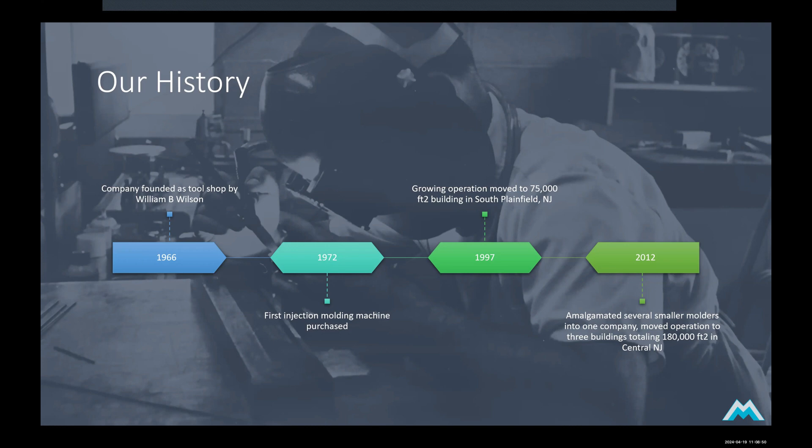Montrose Molders has extensive in-house capabilities. We do injection molding, extrusion, tool making, part design, assembly and labeling, decoration, and we're also ISO 9001 certified with ISO 13485 pending. That's the medical device certification, and we're vertically integrated with resin distribution, so we're able to obtain material at a good rate.

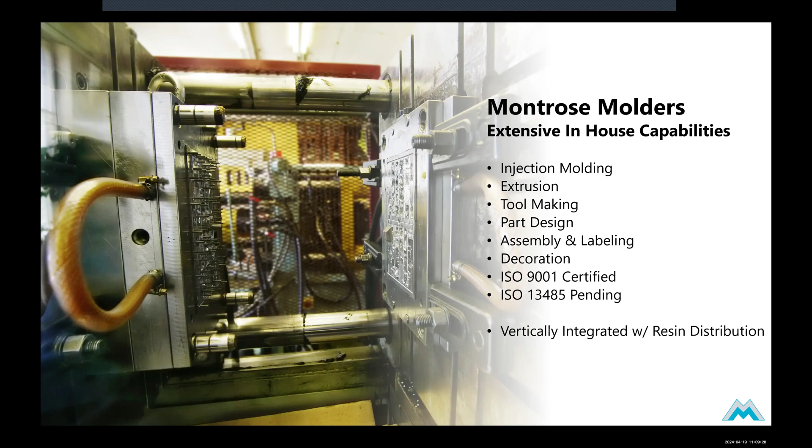Our injection molding capabilities are extensive. We have over 50 injection molding machines from 40-ton to 1,000-ton. We do insert molding, over molding, rotating core molding, and large part molding. We do engineering resins like polycarbonate, ABS, nylon, and TPE, as well as commodity resins like polypropylene, polystyrene, and polyethylene. And we have a large range of part sizes from 5 grams to 5 kilograms, or 11 pounds.

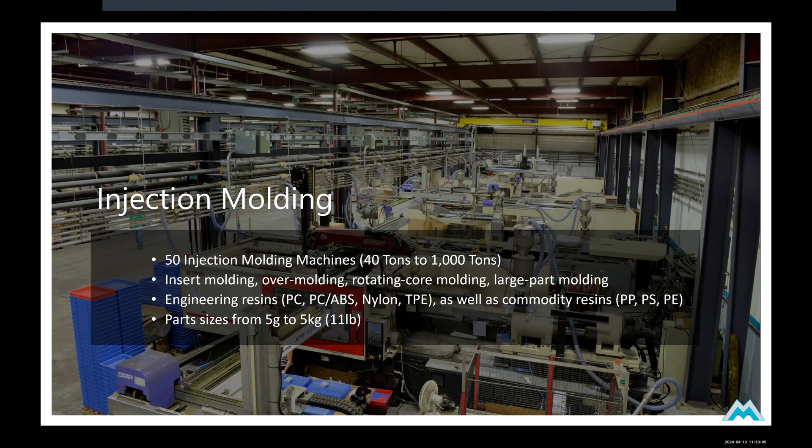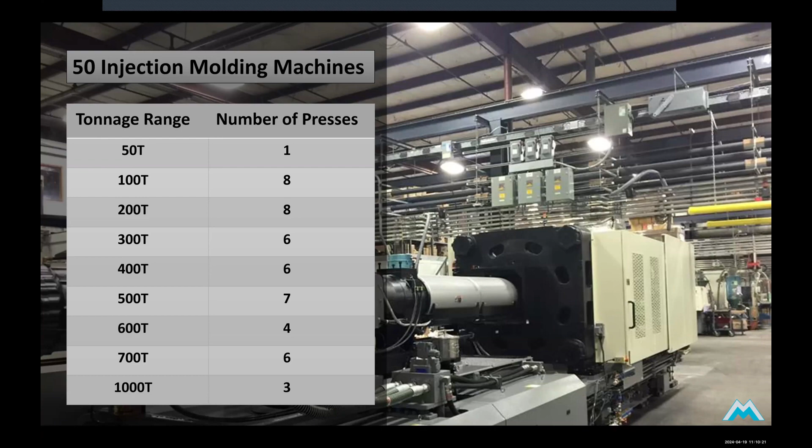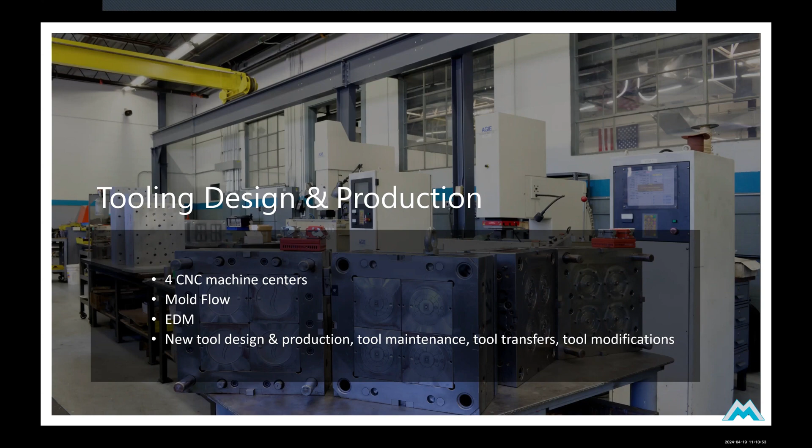We also have tooling design and production, which a lot of our customers appreciate. We have 4 CNC machine centers. We do mold flow and EDM, and new tool design and production, tool maintenance, tool transfers, and tool modifications that allow us to respond quickly to changes, but also for troubleshooting, because we understand how the tool affects the end part quality.

We also do extrusion. We have 2 extrusion lines that are 60 millimeters, and we have co-extrusion capacity or capability.

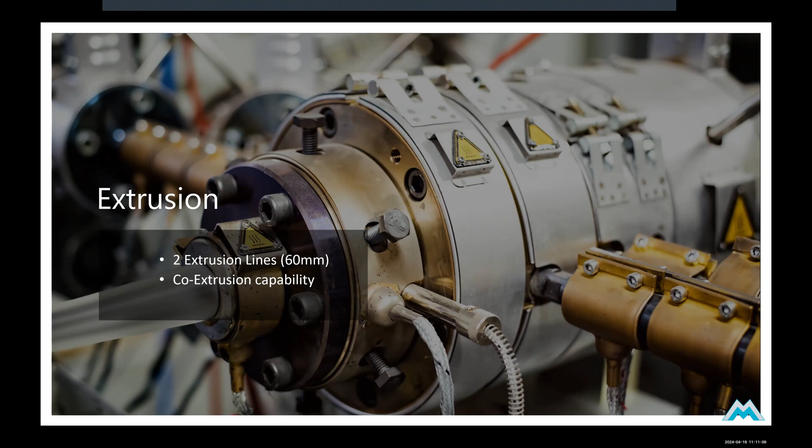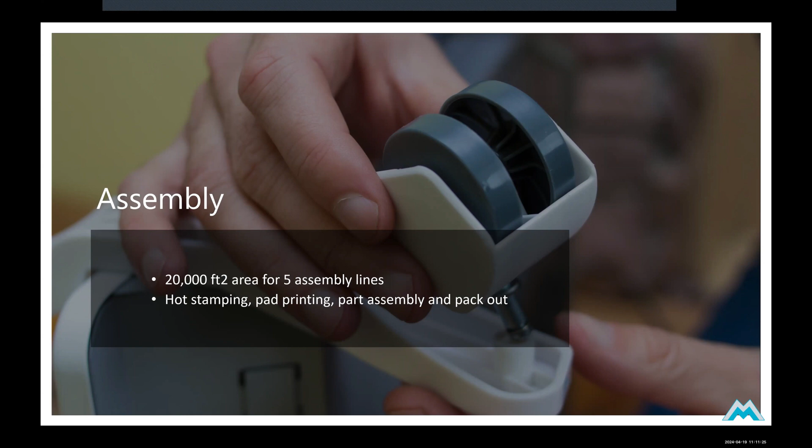We also have an assembly division where we have a 20,000 square foot area with 5 assembly lines. We can do hot stamping, pad printing, part assembly, and pack out, according to your requirements. We're very flexible in that way.

So why choose Montrose? The first reason is that we're a full service manufacturing solution. That includes everything from tool design, tooling production, molding, extrusion, assembly, and packing. We can really be a one-stop shop for you.

The next is our commitment to quality. We have ISO 9001-2015 certification, and our quality system is tailored to each customer's product. And as I mentioned before, we have ISO 13485 certification currently in progress.

We like to think we have superior customer service. Internally, each new customer is assigned a project manager as a step-by-step guide through the entire manufacturing process. So we help you through the whole process.

Again, our tooling capability is extensive. We do preventative maintenance and consistent tooling repair. That means tools run at Montrose are in better condition and run longer than tools run elsewhere, because we can wash them, repair them, and fix them when necessary. And we have a full understanding of how tooling condition affects product quality, so we can get involved earlier than other places would be involved in solving problems.

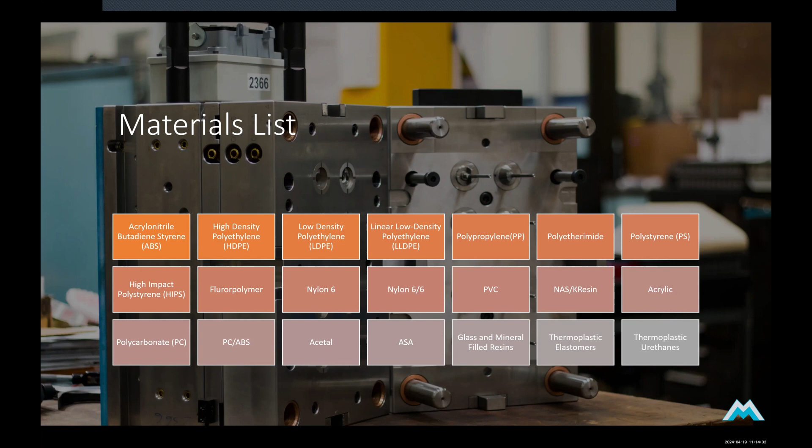We have a wide range of materials that we can mold with. You can see this graph here from ABS, HDPE, LDPE, polypropylenes. We do polycarbonates, nylons, glass-filled, mineral-filled resins, thermoplastic elastomers. Really, we have experience with a very wide range of materials, and that can help you select the right material for your product and make sure that materials run properly in your molds.

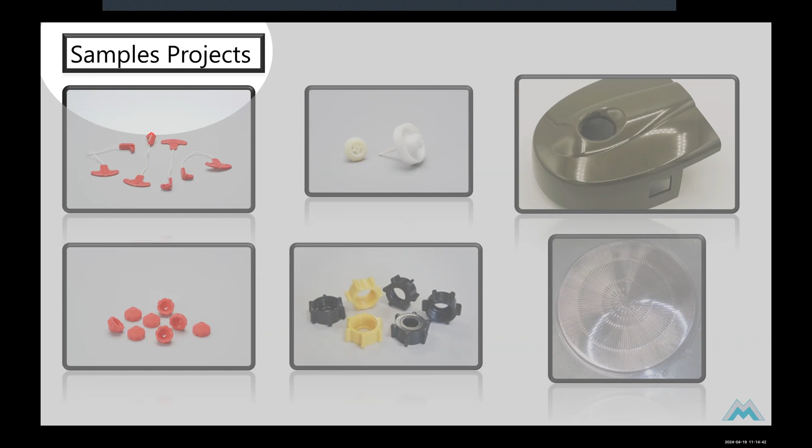So at this point, I want to invite either Brendan or Todd to talk about some of the samples and projects that we worked on.

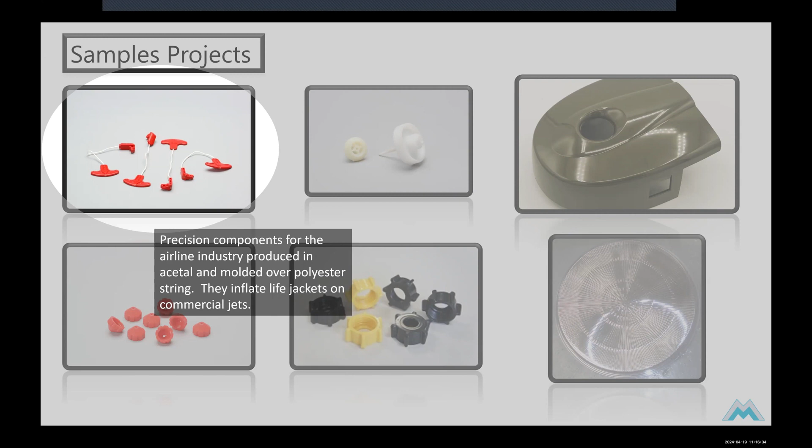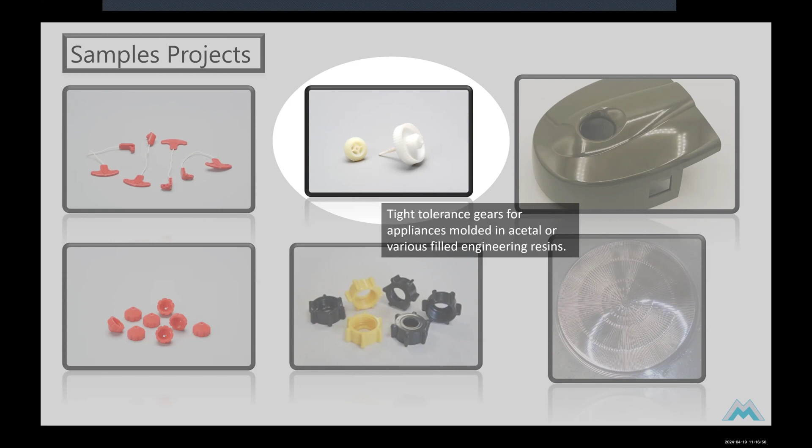We also make a lot of gears, for impeller gears, gearboxes, motor housings, things like that. Typically these parts are made from a low wear, high hardness material like Delrin.

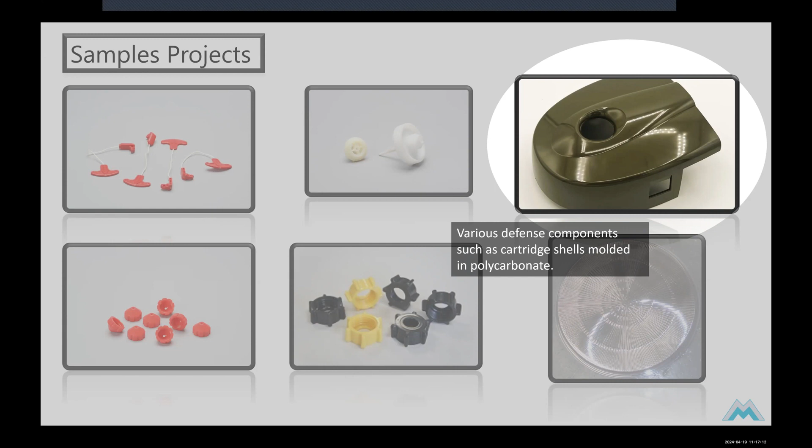The next sample is a cartridge shell. It encapsulates and covers something used in the defense industry. I'm not exactly sure what it's used for, but we produce it for one of the major defense contractors.

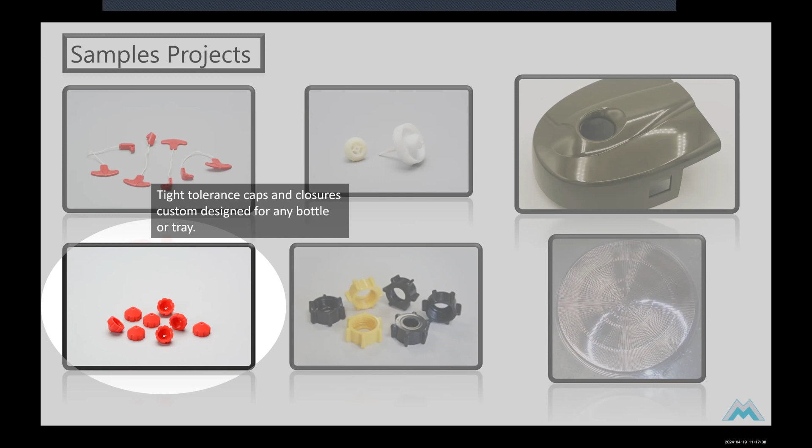We also do caps and closures, a lot of threaded caps and unthreaded caps. These are usually high cavitation molds, so when the molds open, 16, 48, or 96 parts come out. The idea is to make larger molds with higher cavitation to drive down cost and drive up throughput and efficiency.

We also do a lot of work for the agricultural industry. This is a threaded coupler, and if you look closely you can see it has internal threads. When the mold opens, we actually have to spin all the cores in the mold that create this part to effectively unscrew it off the mold, then have it drop into a chute where it's packed. A lot of engineering goes into making a part like this.

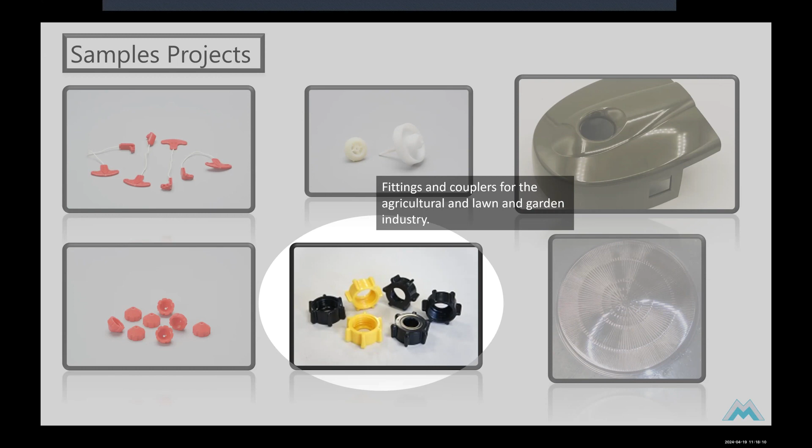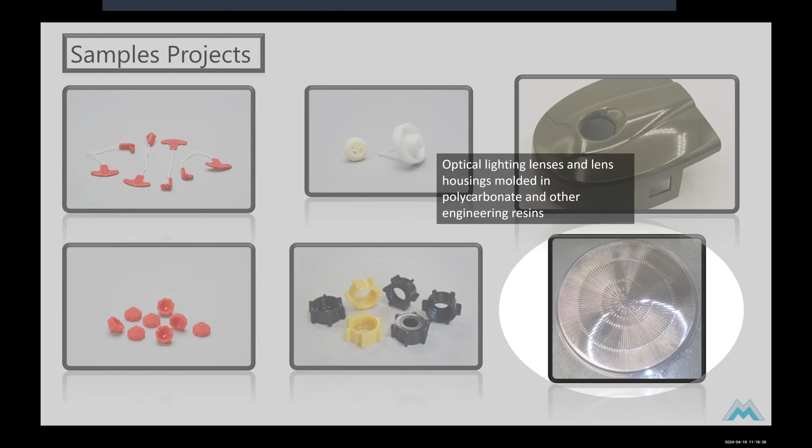We do a lot of work for the lighting industry, lenses of various sizes, shapes and patterns. We also do the housings that encapsulate them and the fixtures they're mounted on. We do a lot of work for a company called Acuity Brands, which is a large player in this industry.

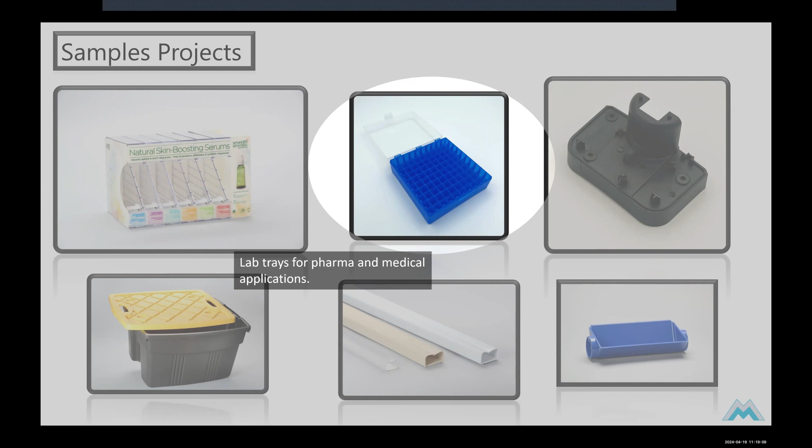This one is a laboratory tray. It stores different lab samples, vials, and things like that. We sell this to a company called Corning that I'm sure many of you have heard of. As you can probably imagine, we sold a lot of these during the pandemic.

This part, I'm sure it's not exactly clear what it is, but it's one of many different parts we run for a different defense contractor, and it's an explosive detection device. What's unique about this part, though it doesn't really show it, is that on the bottom you have threaded inserts. So we mold in threaded brass inserts that allow you to easily assemble this part with hardware.

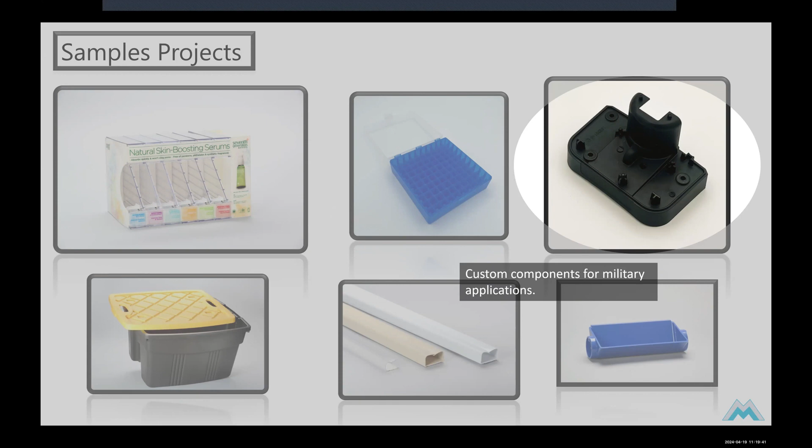Then, storage totes, not only storage totes for the home, but also larger totes and bins that are used in automation equipment for companies like Grainger and Walmart.

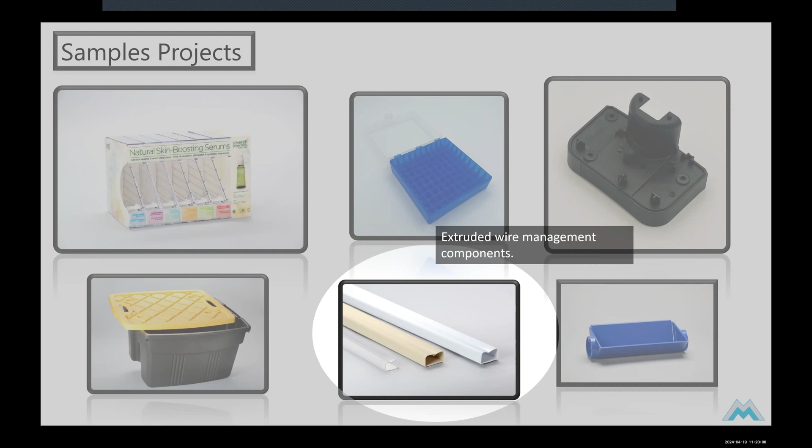This is an example of some of the extrusion we do. This particular example is a proprietary line of wire hiders to conceal wires in an office environment, but we do a lot of different types of profile extrusion.

Finally, we're pretty active in the food space. This bin here is polycarbonate, and it's used in automation to mix foods, think mixed salads, trail mix, and things like that. We also make all of Domino's pizza dough trays worldwide. And that's pretty much it for the sample projects.